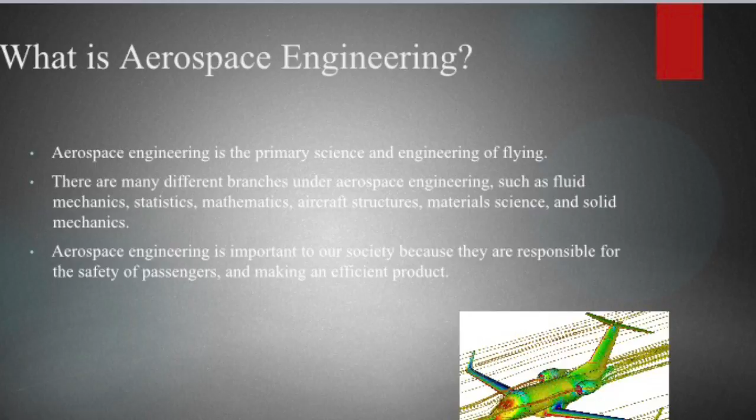Have you ever wondered what aerospace engineering is? Aerospace engineering is the science behind flight. Aerospace engineers are responsible for the safety of passengers and the safety of citizens with military vehicles.

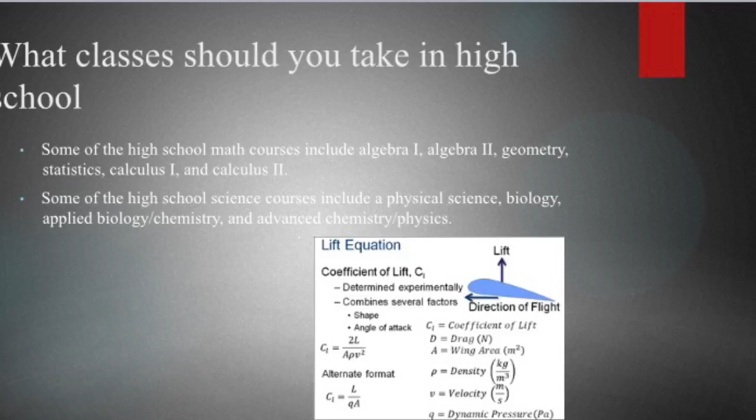You might be wondering what classes you should take in high school if you are interested in aerospace engineering. Some classes you should take include Algebra 1, Algebra 2, Geometry, Statistics, Calculus, Biology, Physics, and Chemistry.

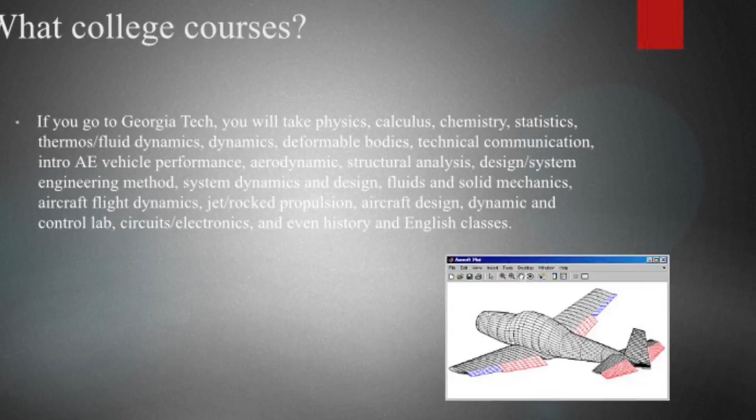The classes you will take in college get more difficult. For example, if you go to Georgia Tech for aerospace engineering, you will end up having to take physics, calculus, chemistry, statistics, dynamics, deformable bodies, technical communication, aerodynamics, structural analysis, design system engineering method, system dynamics and design, fluid and solid mechanics, aircraft flight dynamics, jet rocket propulsion, aircraft design, circuits and electronics, and even a few history and English classes.

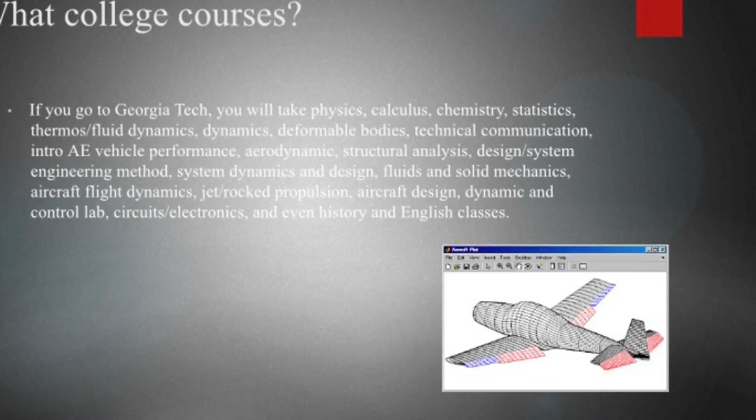There are a few colleges nearby that offer bachelor's degrees in aerospace engineering. A few of these schools include Georgia Tech in Atlanta, Georgia, Virginia Tech in Blacksburg, Virginia, and NC State in Raleigh, North Carolina.

There are a few scholarships available to aerospace engineers. Some of these scholarships include the Aerospace States Association, the American Institute of Aeronautics and Astronautics, and the NASA Aeronautics Scholarship Program.

At this point, you might be wondering where you would end up working if you became an aerospace engineer. A few companies include Northrop Grumman, Lockheed Martin, and Boeing.

For my interview, I interviewed Beth Iliff, my mother's cousin's roommate at the Air Force Academy. She graduated from the Air Force Academy with a bachelor's degree in general engineering. After she graduated, she went on to serve 6 years of active duty and a total of 28 years including reserves.

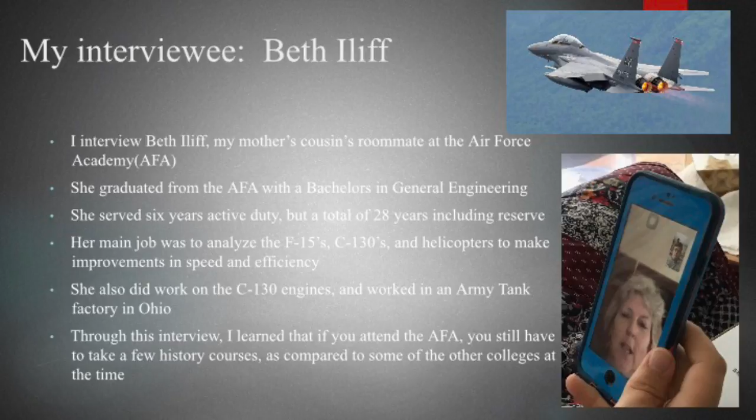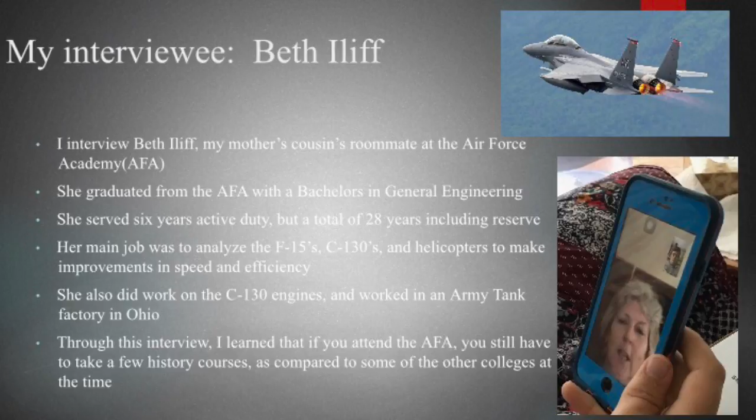Her main job was to analyze the F-15s, C-130s, and helicopters to make improvements in speed and efficiency. She also did work on C-130 engines and at one point worked in an Army tank factory in Ohio. Through this interview, I learned that if you attend the Air Force Academy, you will still have to take a few history courses as compared to some of the other colleges at the time.

My first sample problem is not a super difficult problem. Let's say you have a C-130 Hercules and you have to fit a truck, 20 soldiers, and a pallet of equipment on this plane. In order for it to fly at its most efficient level, you have to balance the equipment perfectly.

So in order to do this, you have to take the total amount of weight on the plane and divide it by 2, so you know where to place it on each half of the plane. Secondly, you have to know how long the cargo bay is so you know how much room you have to work with.

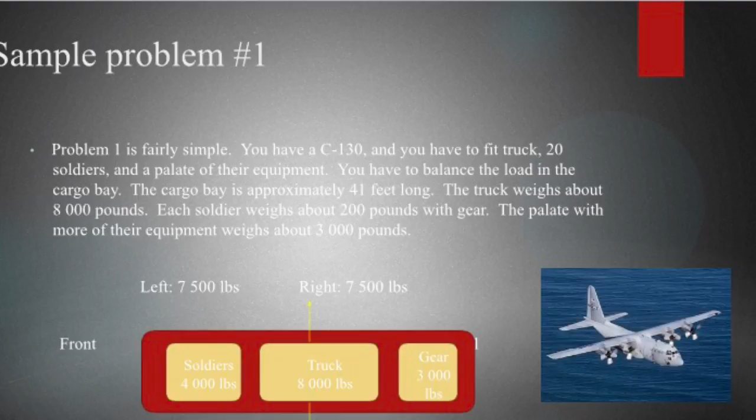Total, there is approximately 15,000 pounds of cargo. The truck weighs about 8,000 pounds. Each soldier weighs 200 pounds with gear. There are 20 soldiers, which means 4,000 pounds. The pallet with more of their equipment weighs about 3,000 pounds, giving you a total of 15,000 pounds. So you end up with 7,500 pounds on one side and 7,500 pounds on the other side.

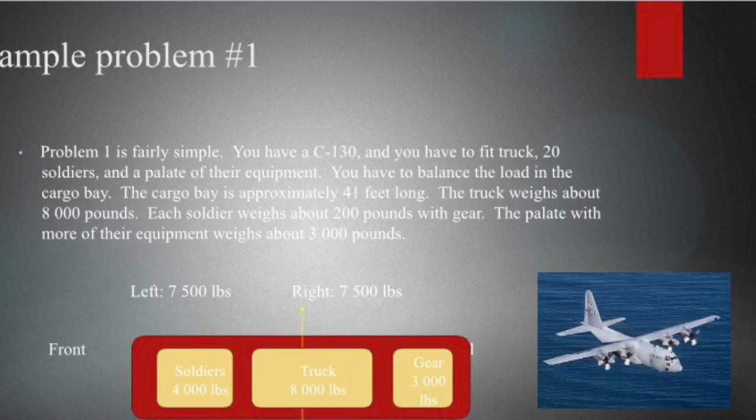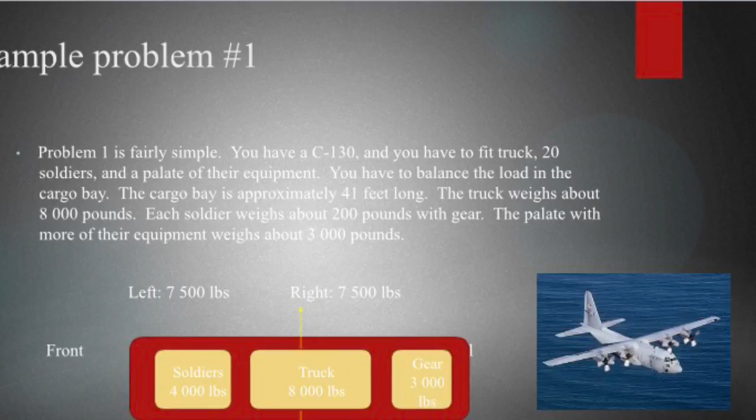To do this, you can put the soldiers at the front, which gives you 4,000 pounds at the front. Then you can put the truck in the middle, but slightly off center, so there is 3,500 pounds to the front of the middle and 4,500 pounds to the back of the middle. On top of that 4,500 pounds in the back, you would place the gear, which is 3,000 pounds, giving you 7,500 pounds in the front and 7,500 pounds in the back.

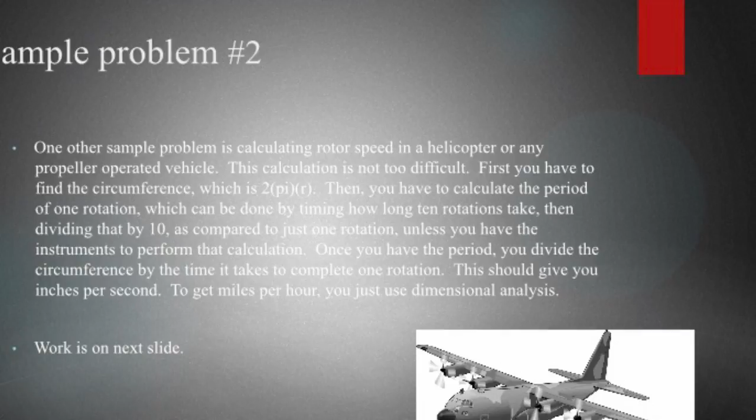My second sample problem is a little bit more difficult. In this problem, you will be calculating the rotor speed in a helicopter or any other propeller-operated vehicle. This calculation is not super difficult.

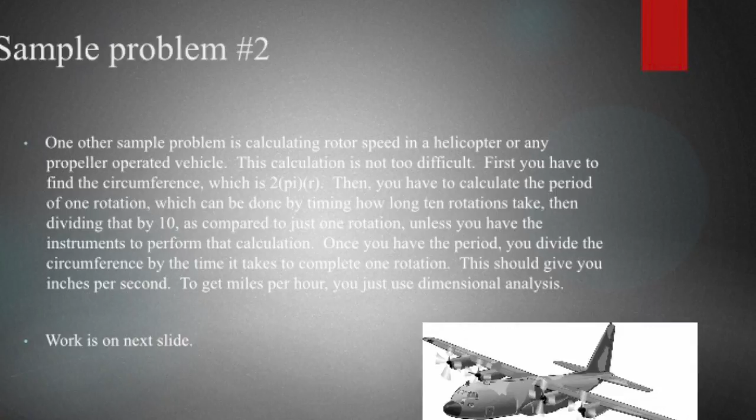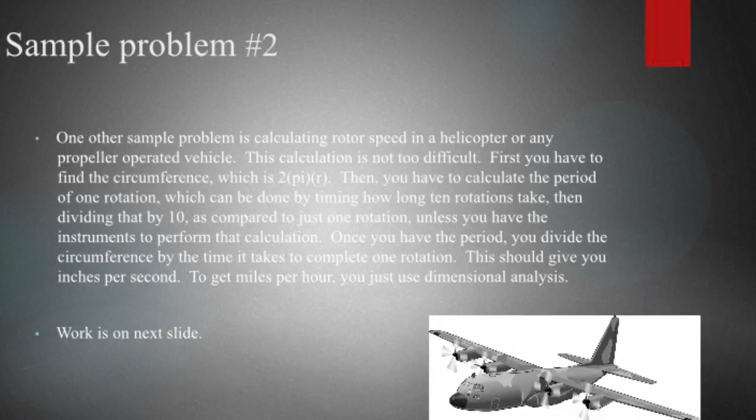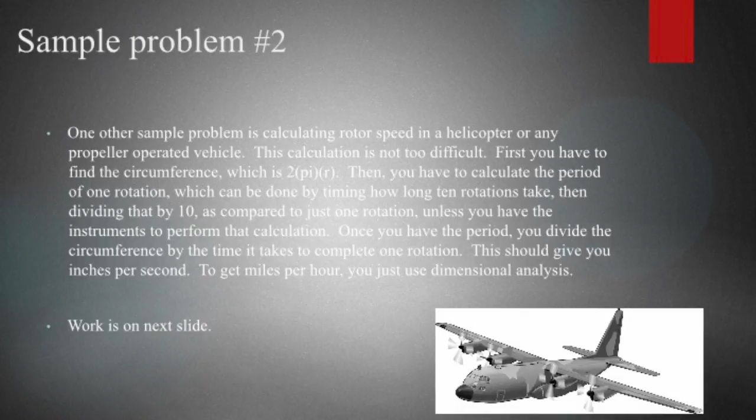First, you have to find the circumference, and the formula for circumference is 2 pi r. Once you know your circumference, you have to calculate the period of one rotation, which can be done by timing how long 10 rotations take, then dividing that by 10, as compared to just one rotation, unless you have the instruments to perform that calculation. The reason you don't want to just record the time for one rotation is because of human error.

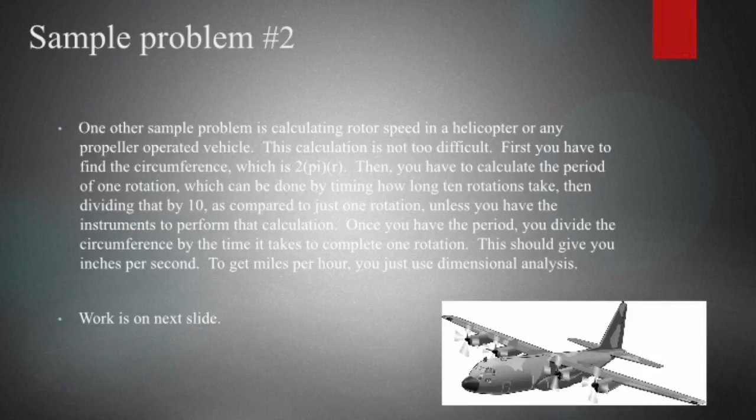Once you have the period, you divide the circumference by the time it takes to complete one rotation. This should give you inches per second. To get miles per hour, you just have to use dimensional analysis.

Alrighty, so let's say that you're calculating the rotor speed of a C-130 Hercules engine. In order to do this, you will need two different pieces of information. First, you will need the circumference of the path traveled by the tip of the rotor. Then you will need the revolutions per minute, or RPMs, of the engine.

For the first piece of information, all you really need is the diameter of the path traveled, which is 13.5 feet. In order to find the circumference, you have to multiply the diameter by pi, which gives you 42.4115 feet.

So now for the second piece of information, let's say that the engine is operating at 1000 RPMs. We use RPMs instead of the period because it is too difficult to calculate the period based off of human eye coordination and getting the actual proper timing. So let's say the engine is operating at 1000 RPMs.

It's easy to convert RPMs to revolutions per hour because minutes convert very easily to hours. So you take 1000, which is the revolutions in 1 minute, and multiply it by 60, which is how many minutes are in 1 hour, and you get 60,000 revolutions an hour.

So now that you have both of your pieces of information, all you really have to do is multiply the two together. Once you multiply the two together, you get 2,544,690 feet per hour. But who really measures speed in feet per hour, especially when you're talking about something going that fast? So we're going to convert that down to miles an hour.

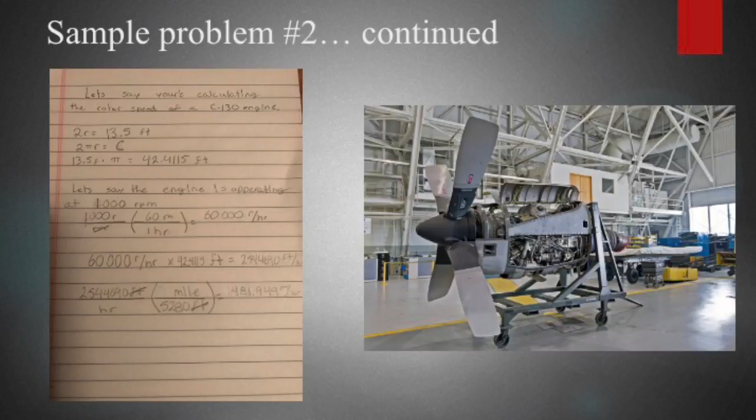In order to get that down to miles an hour, you have to use dimensional analysis. So basically you take the 2,544,690 feet and divide it by 5,280 feet, which is how many feet are in a mile. This results in 481.949 miles per hour, which is your final answer.